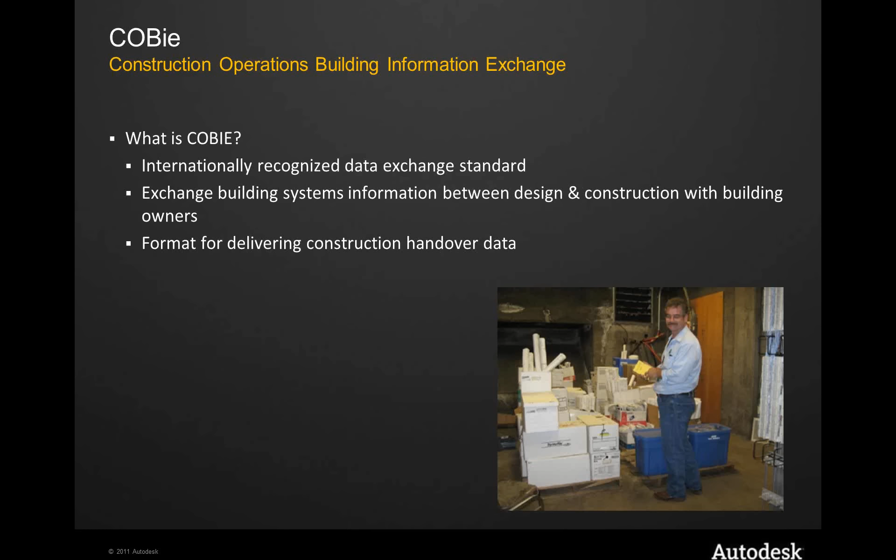It's intended to allow repair, maintenance and renovation task data to be electronically exchanged. It's an internationally recognized standard, and it helps the communication between design and construction teams and the building owners, because it creates a standard that allows for known data fields to be passed throughout the life cycle of a building. So that's the start with COBie.

Next slide. Now, also today we're going to talk about Autodesk's Revit COBie Toolkit. This is a template and some tools that help facilitate collecting the COBie data and passing it downstream. It starts with, within Revit, the facility information and the contact information, which are two pieces of data that COBie asks for.

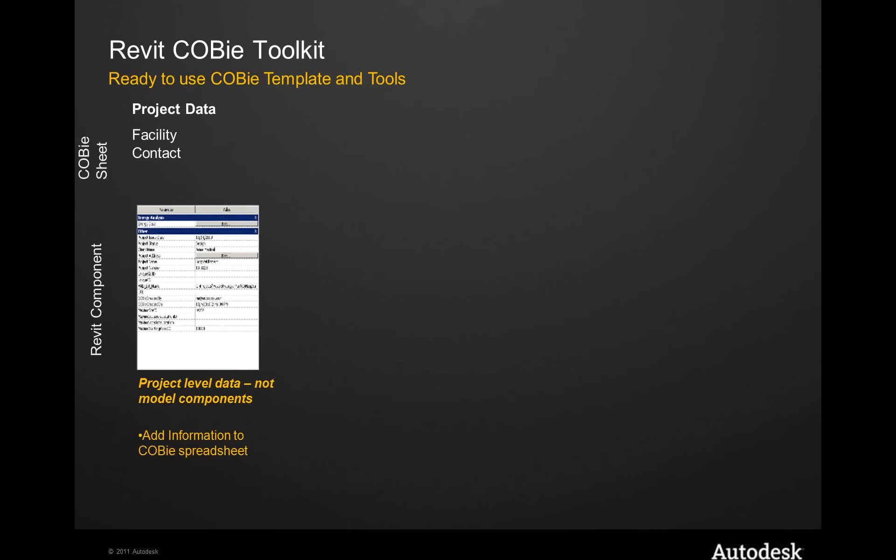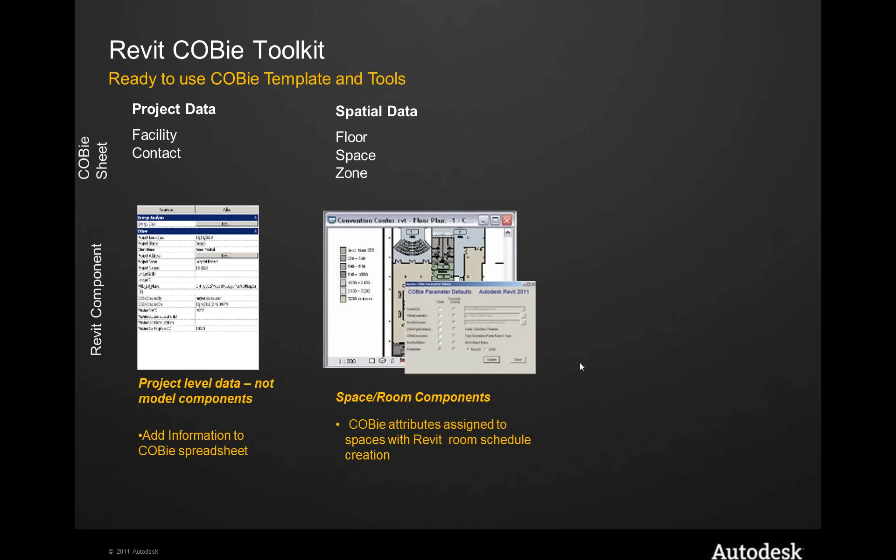If we go to the next. It also includes the spatial information within the BIM model, the floor information, spaces, and zones, which are required COBie data, as well as the building components and MEP equipment. So COBie has many different pieces of data, and we're going to show how the design team can use Revit to populate these sections right now.

And then also to do a little bit more level setting, and this might be redundant for many on the call, but I want to talk about building information modeling as a process, a way to provide coordinated and consistent information. It's a way to simulate or predict the building's behavior. I think a classical application is clash detection, to make sure that all the designed objects are occupying space on their own and not in the way of something else, as one example. But it's an integrated process in order to understand how the building goes together before it's constructed. So that's a quick definition of what building information modeling is.

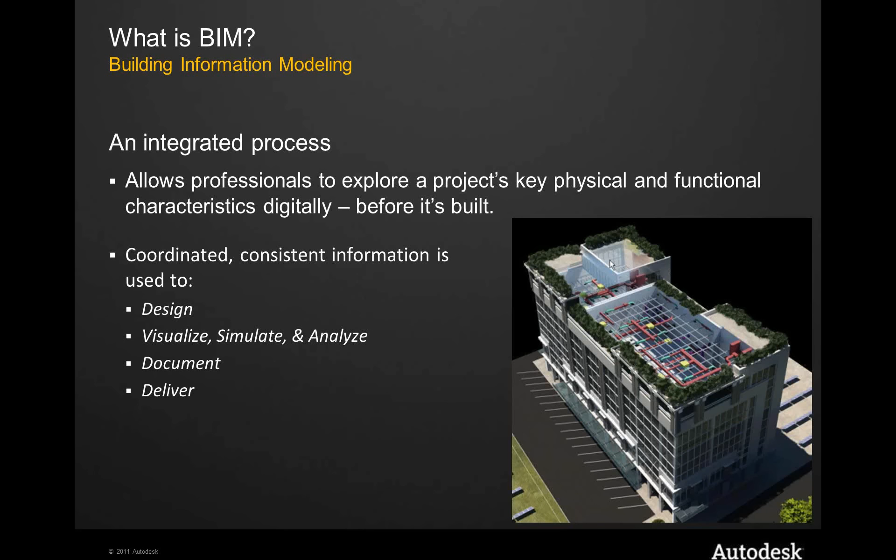And the next slide will slice it from a slightly different angle, which is: what is the building information model? Of course the model participates in the modeling process, but in the model are things we expect: doors, windows, walls, rooms, and equipment—three-dimensional objects that allow us to graphically understand the design, but also have other properties. These other properties are attributes—non-graphic properties, different pieces of data that we can append to the graphical elements just to make them more informative.

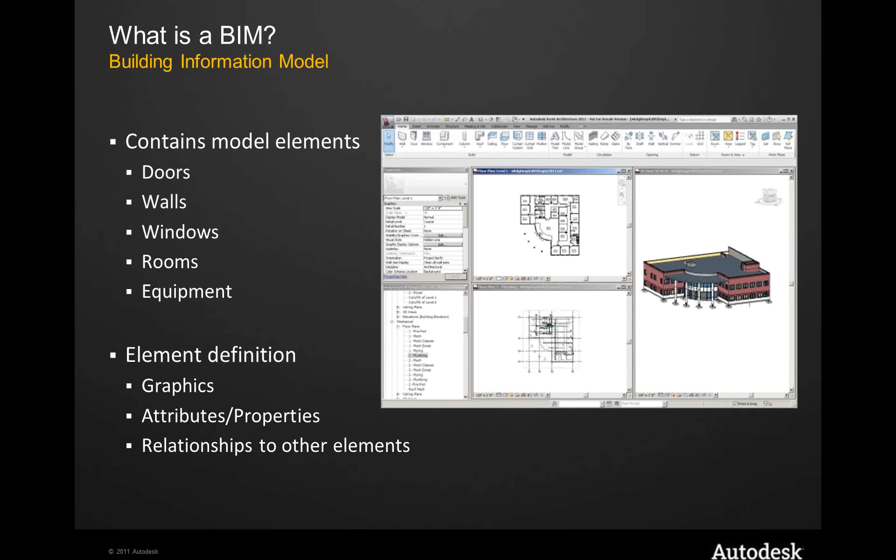And this is where we link in the COBie exchange standard with part of the BIM modeling software, that we've got lists of attributes and properties that are conformant with what COBie is asking for. But the model also has another aspect, which is the relationship to other elements, or the parametrics or behavior of the objects in the BIM model—how the floor relates to the walls, how the doors relate to the walls—and this whole behavior of the model is a building information model. So slicing BIM from two different angles, one as an integrated process and one as a 3D data file, is probably all we need to say about building information modeling, just to get everybody on the same page.

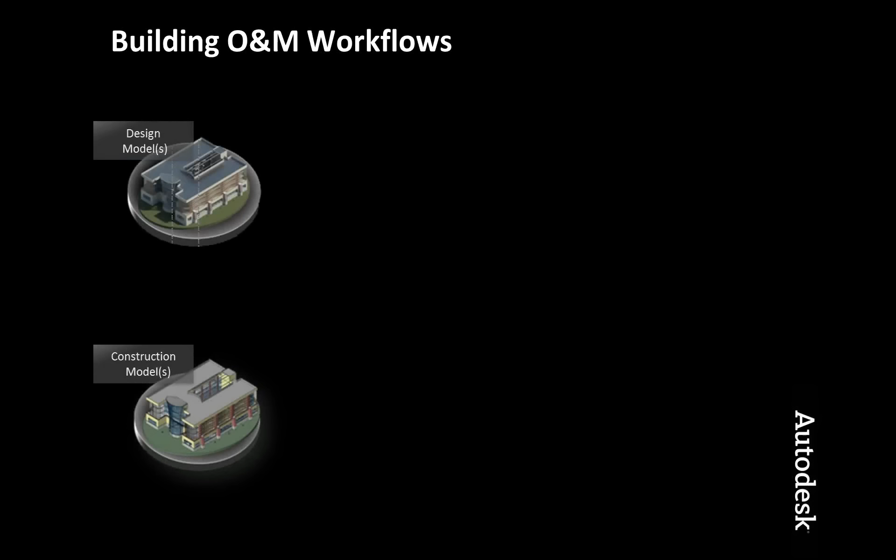So next slide, please. Okay, so then, and this is a schematic, and Rich, if you want, you could roll this out for the most part, but this is sort of a schematic of conceptual workflows, and there's definitely variation probably on every single project—a bid build project or design build—and sometimes if the teams are well coordinated and integrated, the design model will pass fairly smoothly to the construction model, but often not.

But if we start on the left, we've got the design BIM models and the construction BIM models. These are going to meet at this schematic conceptual point of an owner's model view. This owner's model will have information—if we're doing things the way that we want them to work—it's going to have the COBie information from the design team, and it's going to have the COBie information from the construction team. Rich will show how this happens in particular, but they sort of meet at this owner's model.

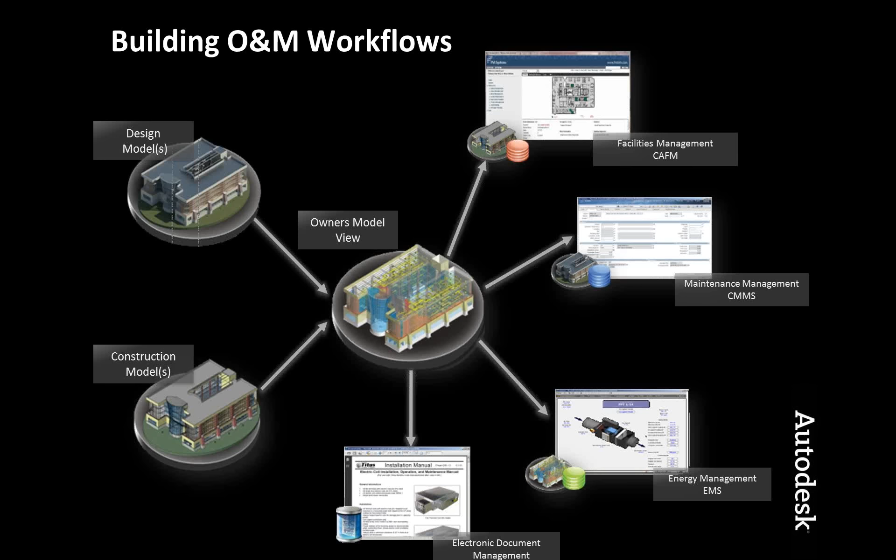So we have the graphics, we have the attribute information, we have COBie information, and then we have it in a way that's usable, that's searchable, and able to participate in other types of systems, such as a facilities management system, or maintenance management, or energy management, or document management. So this whole idea of COBie is that we want the data to be transportable to the place that it is most useful, and to be able to do this in an easy, effective and efficient kind of way. Okay, next slide.

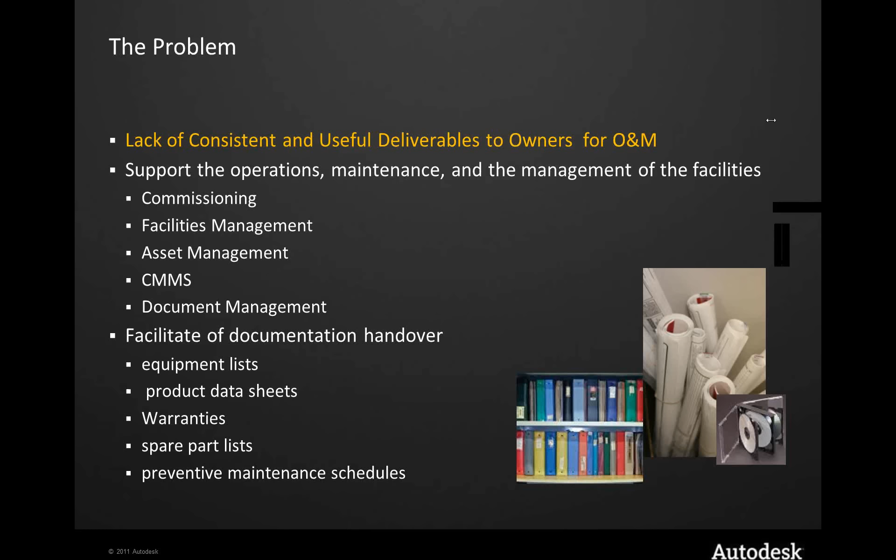One of the things we're trying to avoid is data that isn't really useful. A good example would be handover information that comes over as hard copy, which is useful to a certain extent, but COBie is a much more portable and effective way of doing that. Even electronic handover may come as a series of PDFs which aren't quite as useful. We've seen one project where all the hard copy documentation was scanned into one gigantic PDF, and it met the requirements of electronic transmittal but was fairly problematic to use. This lack of consistent and useful deliverables for owners and operation maintenance is a real issue, and it's one that COBie is well framed to address, helping with that part of the design-construction handover process.

So next slide, Rich. I think that's about all for me. Do I have another slide, Rich? Yeah John, you've got the slide regarding graphic and attribute data collection, creation and editing. Oh, that's right, okay.

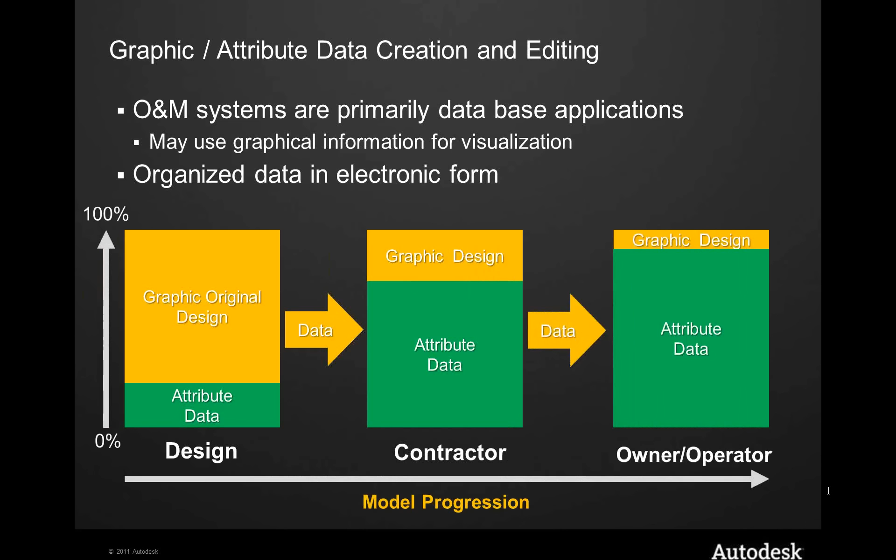One of the challenges of working through this workflow is that early in the design stage, the information is, for the most part, graphically oriented. Understanding the design is a very spatial kind of process, and the attributes on that information, while there might be some specifications or specific information about those objects, aren't known yet. They've been designed conceptually, but they haven't been installed, so some of this information isn't really known.

But as we move to the contractor, that mix changes. We see attribute information during construction playing a more predominant role, and then on to the owner and operator, the graphical information becomes much less significant. If a tenant is changing a space, or someone is moving in and out of a room, it may be an easily described database attribute change with no real graphical implications. So one of the challenges of working in this life cycle is that the mix of graphic to attribute information is sort of in flux.

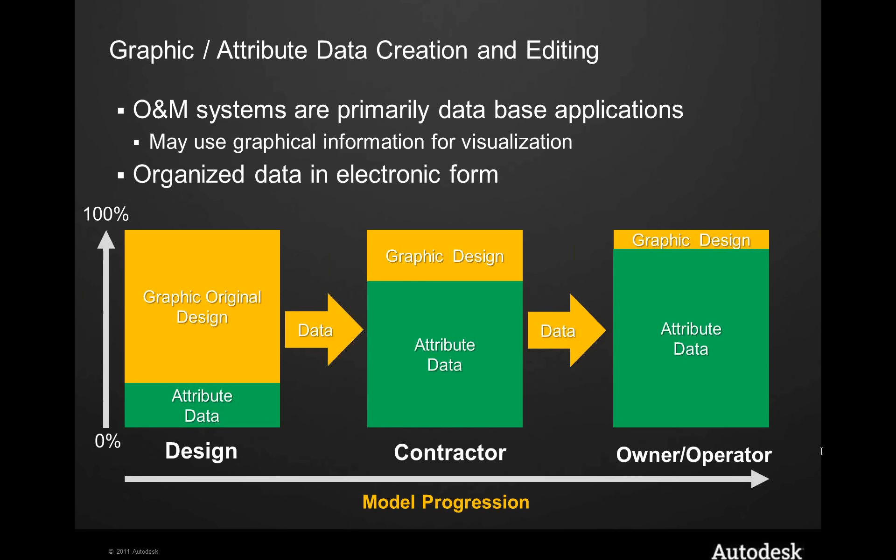COBie helps harness this because it participates in all the stages. It captures as much information as possible in the design phase, passing it to the contractor, and then ultimately to the owner-operator as a series of attribute information. So this is a challenge, but it's one that COBie helps with quite a lot.

Okay, next slide Rich, and hopefully I get this one right. The last slide I have is that the BIM can be used to populate COBie information, but it doesn't have to be. The COBie deliverable essentially is a spreadsheet, so information can be typed directly into it, but we really feel strongly that using building information modeling with COBie is the better approach.

Using BIM with COBie, one, allows the process to be built in rather than added on. Two, it helps with quality because of that orientation - throughout the process you're adding information. And three, it helps apply quality assurance standards because you're funneling it through the design process rather than just typing it into a spreadsheet. So it can be done manually, but using a Revit utility with COBie greatly facilitates the process. And I think that's it for me.

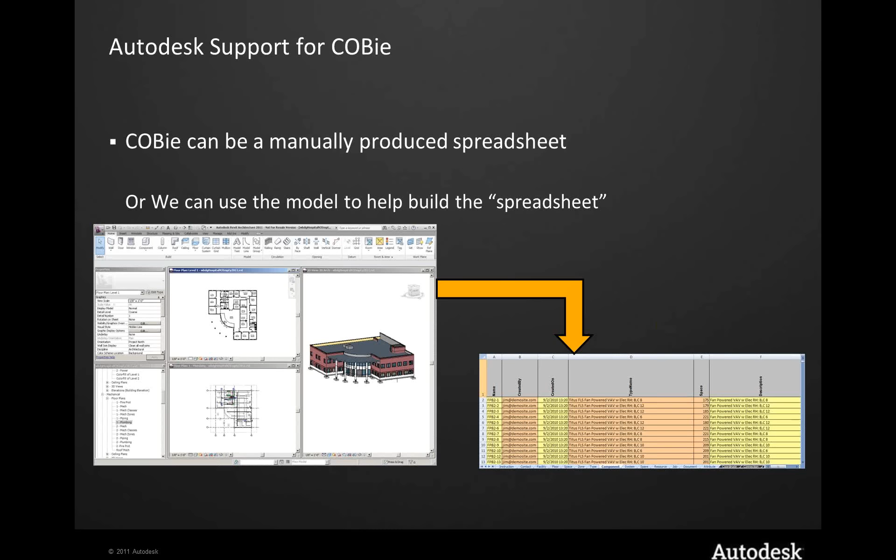Rich, turn it over to you to give us a more detailed explanation of COBie and show us how it works.

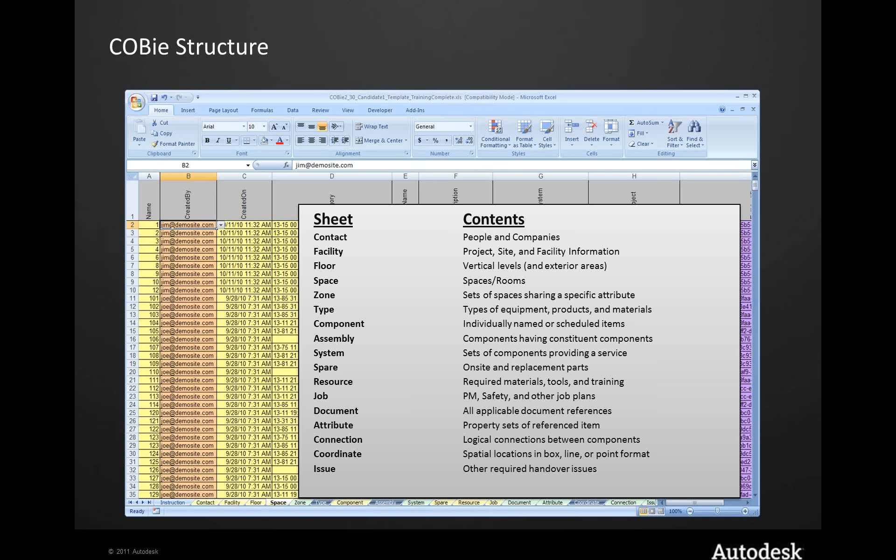So as we go through COBie, what I'd like to do is help you understand the structure of the spread. I'm going to do it in the context of the spreadsheet, but understand that COBie is really structured as a series of worksheets in a workbook, spreadsheets within a larger spreadsheet. You could look at it as tables within a database. It's really about understanding the hierarchy and the context of the information in the way the data is structured.

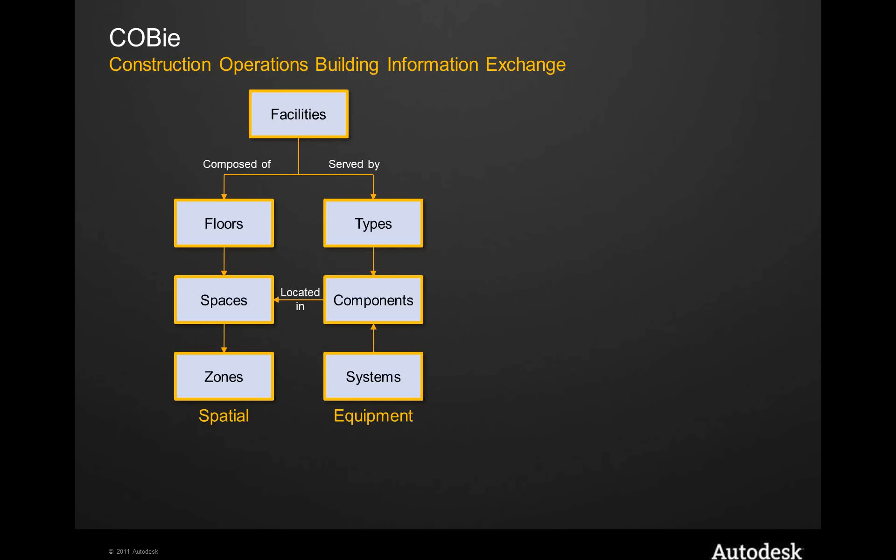So what I'd like to do is use a graphical view to help understand the hierarchy of the information we're going to be working with. If you look at a COBie spreadsheet, one of the first tabs you will see is the Facilities tab. To understand the flow of the data, we can look at facilities being composed of a series of floors or stories, which contain spaces, which can then be grouped into what we refer to as zones, or groupings of the space itself. In addition, those facilities are served by a series of equipment types and then actual instances of that equipment, and that equipment can be grouped into logical systems. So that's the basic spatial and equipment hierarchy of the model itself.

In addition to that, there's some information also added to the COBie spreadsheet which defines job sequences and job steps by describing the steps in a particular job, the resources required to do a particular task or job, and what spare parts or equipment might be required as part of that job sequence.

In addition, we'll find a number of what I'll refer to as common tabs, which refer to things like who the contacts are—analogous to a contact list in Outlook. Other tabs specify the documents that are attached, any issues that have come up, simple coordinate geometry, additional attributes, connections, and various other information about any one of these levels of information.

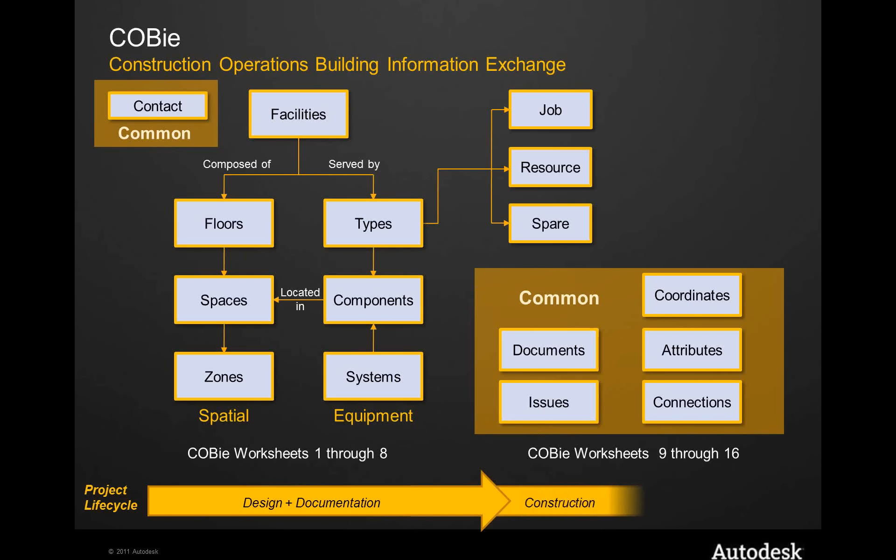So if we look at this structure, moving from left to right, we're moving from COBie sheets 1 through 8, and then 9 through 16, which is the supplemental information. Typically that information is built out in this process of left to right. Data is going to be added through various aspects of the project itself, but in terms of understanding where some of this might be created, it generally flows from left to right.

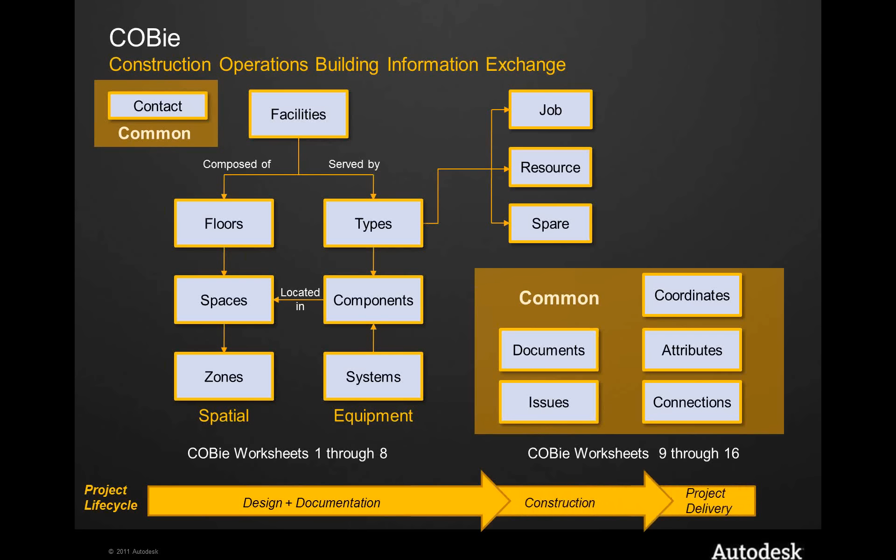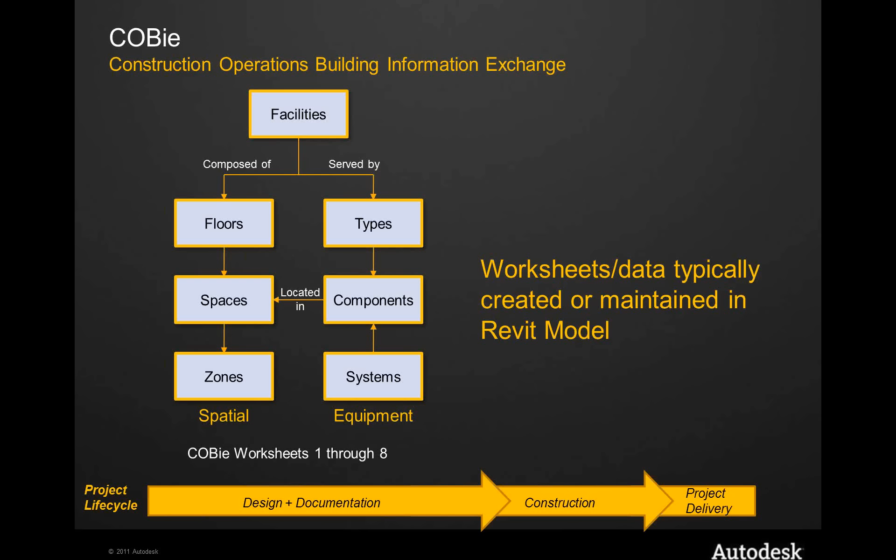The next part we really want to talk about, the area we're going to focus on, are the 7 sheets we see here, which are typically the ones created and maintained in the Revit model, or in the building information model. Again, this is not meant to be all-encompassing about COBie, but really about understanding how the COBie data model fits and applies to the Revit model.

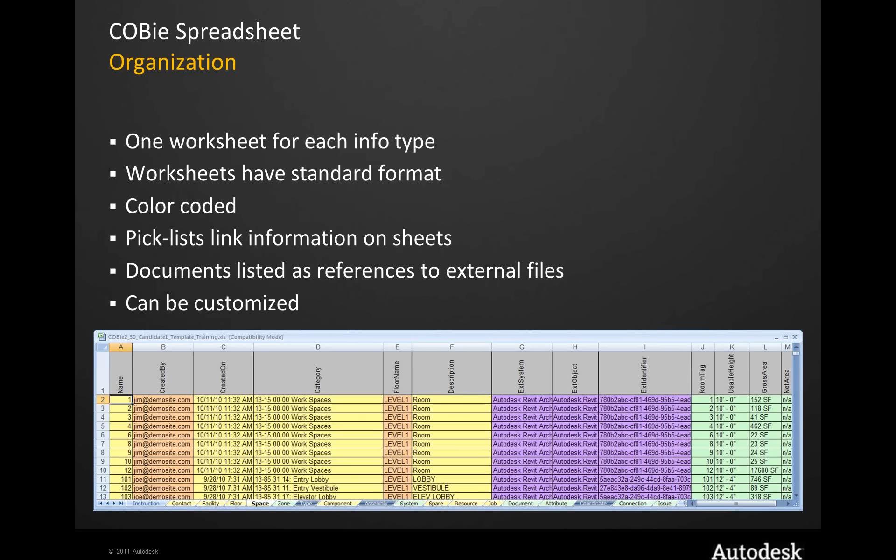Before we move on, I want to go over a few things about the COBie spreadsheet so everyone understands what the colors mean and what's going on when they're looking at this. Typically, you're going to have one worksheet for every information type, so spaces are on their own sheet, floors or stories are on their own, equipment types will be on a separate sheet. They're color-coded, and where possible there are a number of pick lists provided to facilitate data entry. We can add documents to any of this as a reference to external files, and there's a level of customization we can also apply to the COBie spreadsheet.

So if you look at a standard COBie spreadsheet, the first thing you'll see is that there are typically 1 of 5 colors for the columns. Anything in yellow is a required field that would typically be entered on that sheet. Anything in orange is a required foreign key, meaning that value would most likely have been defined on a previous sheet.

For example, if we're looking at the space tab in the spreadsheet, you'll see that level 1 is a floor, and it's shown in orange, which means I would have had to define the floor—the story that space is on—before I could create the space. So basically it's just saying that information resides on another tab. Anything in purple is typically populated by the authoring software, describing what application did that—in this case Revit—the type of object it is, and any external IDs.

You'll also see green, which means it's required only if specified by the owner. And on some of the sheets, you'll see gray or white columns, which again are regional or owner specified, so they would only be used if required.

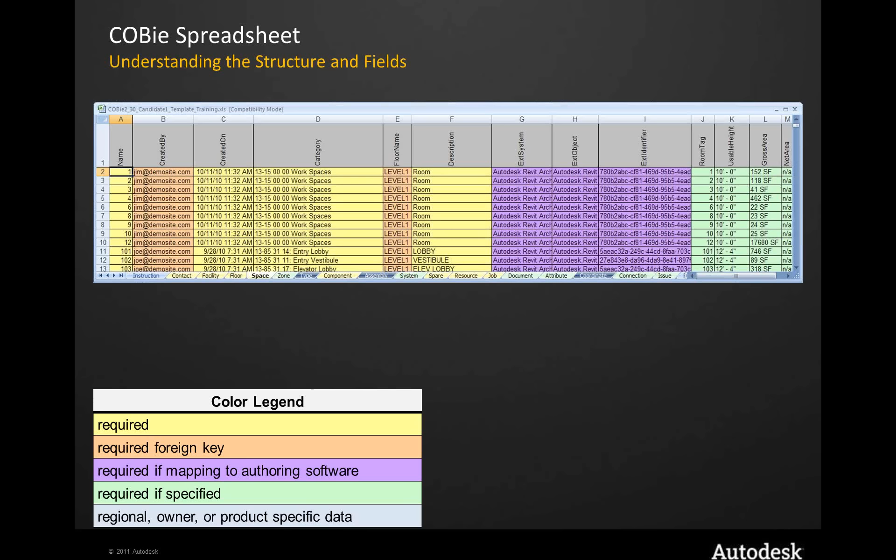The other commonality across all these sheets is that every spreadsheet will have these 5 columns: created by, created on, external, and the system created information. Typically, we're going to help populate that information, so it's not something you'll have to do manually.

Being common to all the sheets, something interesting when you look at the sheet is that if I eliminate those columns from the view, the spreadsheet begins to look more like something we'd be accustomed to. If I remove created on, created by, and external, it's a standard space definition: the name of the space or space number, category, classification, the floor it's on, a description, secondary room tag, usable height, gross area, net area. It's a fairly simple definition that can get overwhelming when you see all the other tabs.

For most of the tabs, you'll notice there are fields that will be managed and typically required by the authoring software. In the case of Revit, for a space, you'll always have a room number, a level it's on, typically enter a description, and the usable height and gross area are calculated fields, so those will be populated for you.

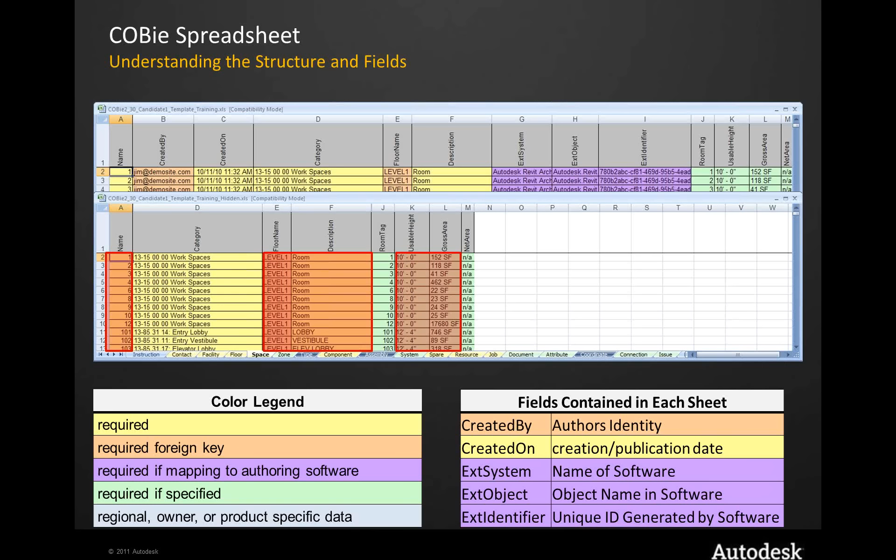Really, the only information in this core portion of the space tab for COBie that we'd need to fill in is the category, the room tag, and the net area if required. So a lot of that information is going to be populated for you.

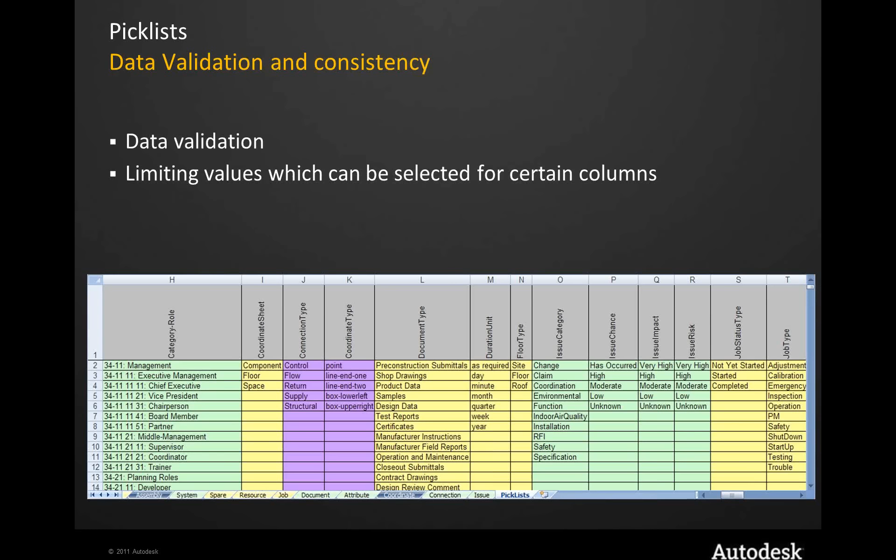There are a number of pick lists. In effect there are 17 tabs, and the last tab shows a series of pick lists. Those pick lists have the values used, for example, in space classification or a document type for documents, and different data such as that.

So how do we get from the Revit model to the COBie output? In this case, we'll be working with the spreadsheet, so let's try to put all this together and map some of this.

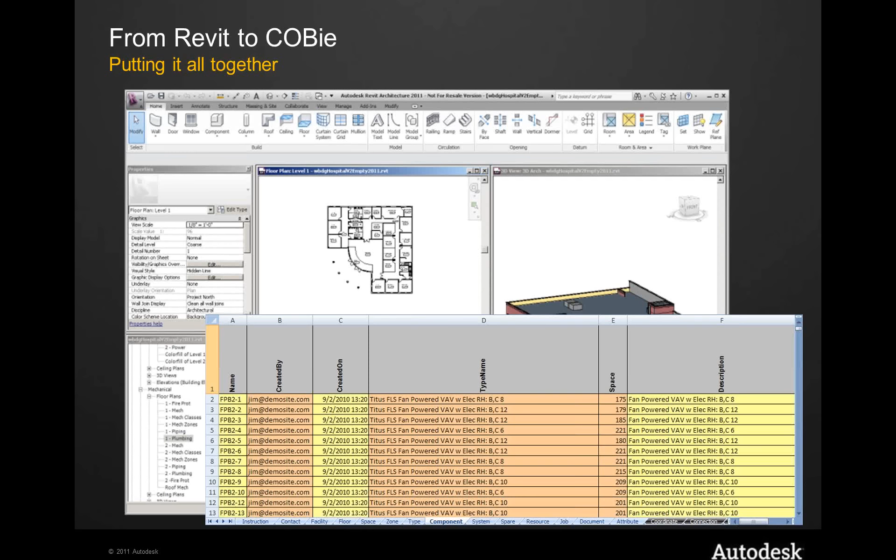I'm going to make an assumption here in this presentation that there's a familiarity with Revit and the building information model. I'll try to deal with it from that perspective, but I think there are analogies to other applications as well.

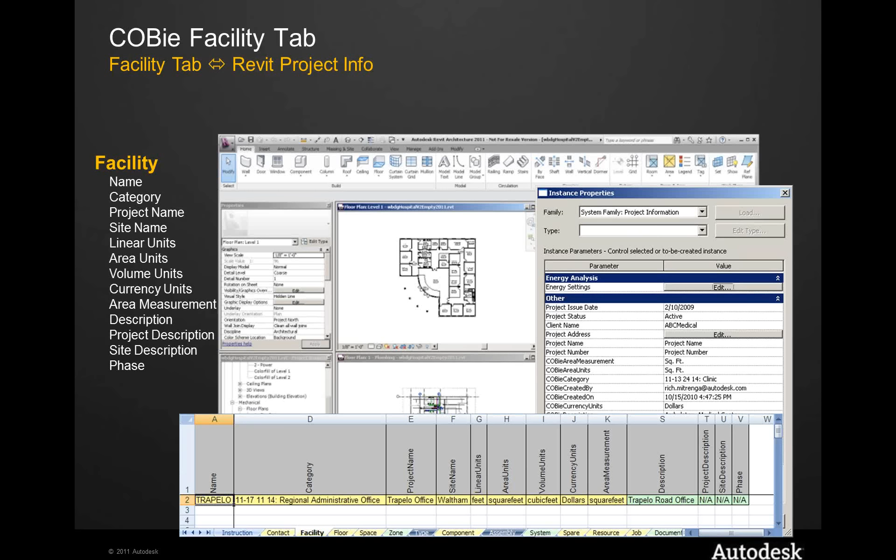The first thing we have when we look at the COBie spreadsheet is the Facility tab, and it's directly related to the Project Information tab. It describes the characteristics of the project, the building, or the model itself — things like the name of the project, the site name, what units we're using, a description, address of the site, those kinds of things. The data you'll typically populate comes directly from that project information parameter, and in the COBie spreadsheet there will typically be only one record on that tab.

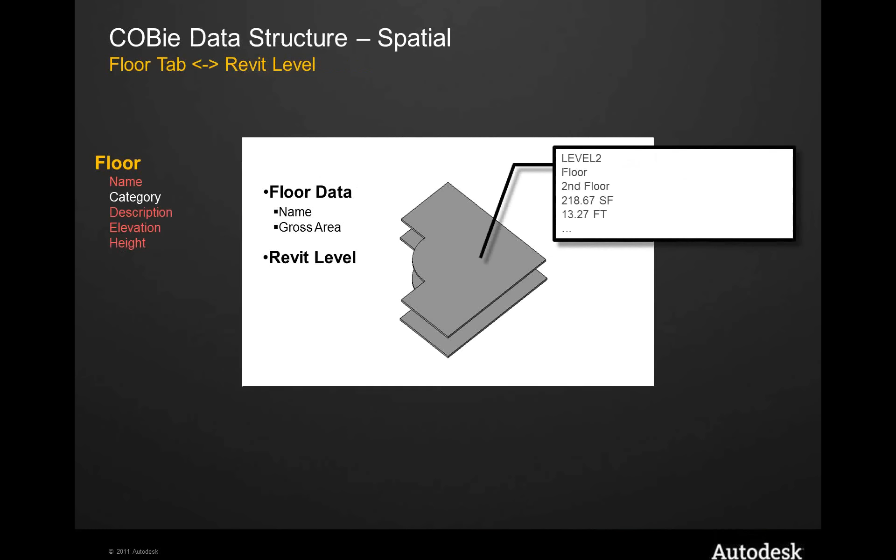The next tab as we move across is the Floor tab, which refers to floors or stories of a building and is typically directly related to the Revit levels. You'll typically have an entry in this sheet for each level in the model, and that level is analogous to the story or floor that a particular object or space is on. It's described simply by the name, the category or type of level or floor it is, the description, elevation, and height.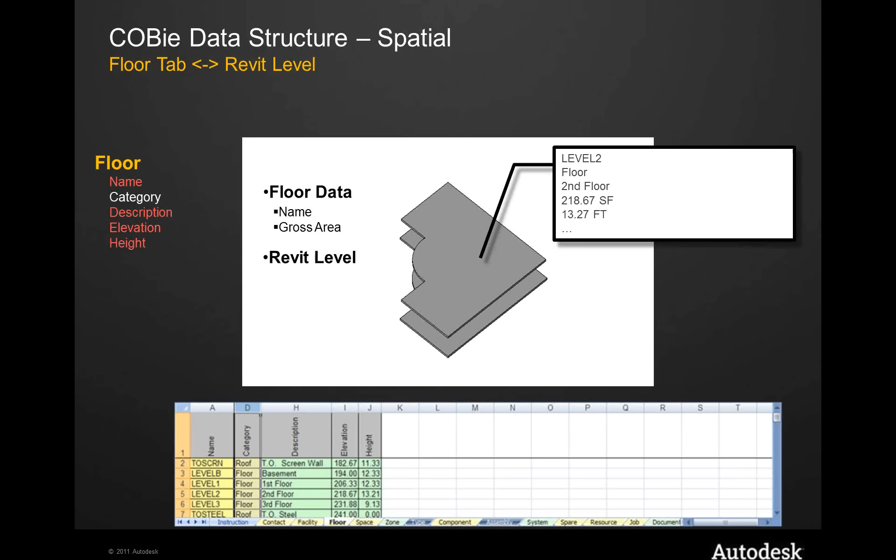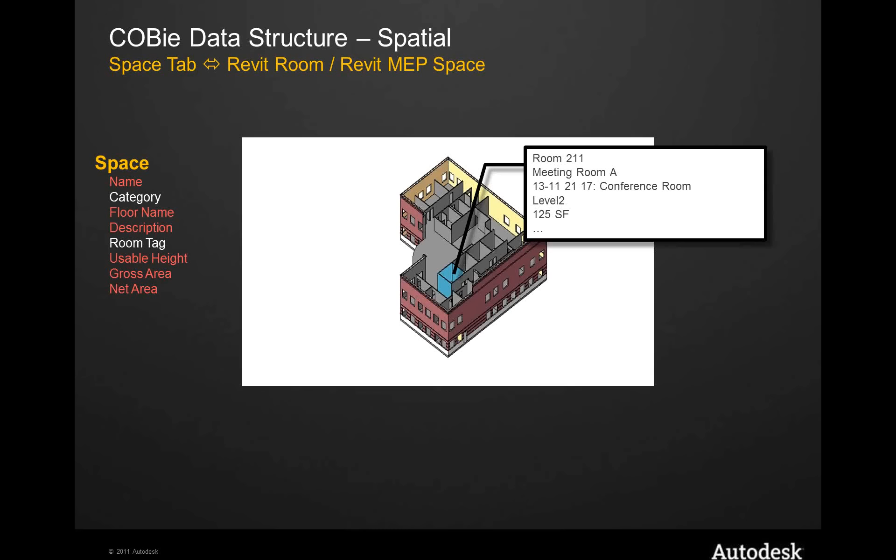And again, a lot of that information is going to come directly from the Revit model. As we continue moving to the right, the next spatial component is the Space tab, which is directly related to a Revit room or a Revit MEP space, depending on how you're doing that. There will typically be a series of spaces on each of the floors that we define.

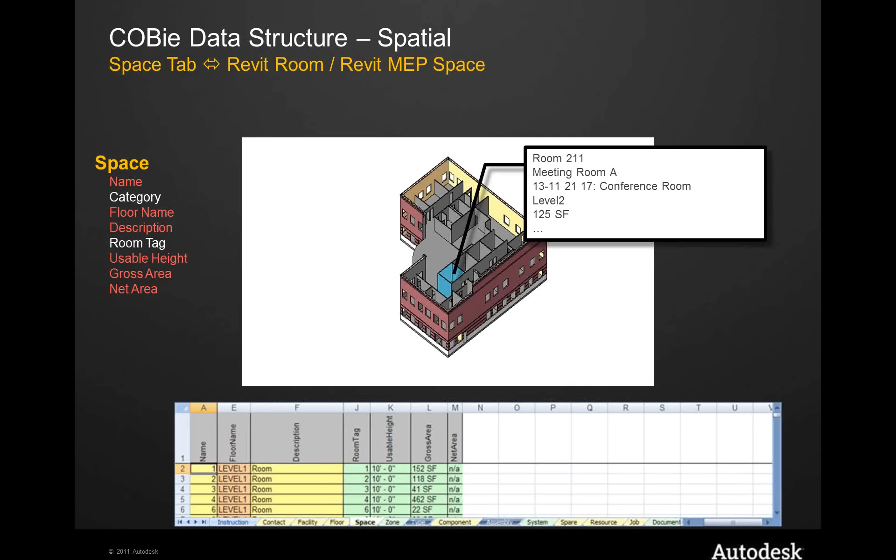So as we look at this, we have a facility. Within that facility, we have a series of floors, and on each of those floors, we will have a number of spaces. So now we're into the process of classifying those spaces. We have name, category, simple information that is required for the COBie spreadsheet.

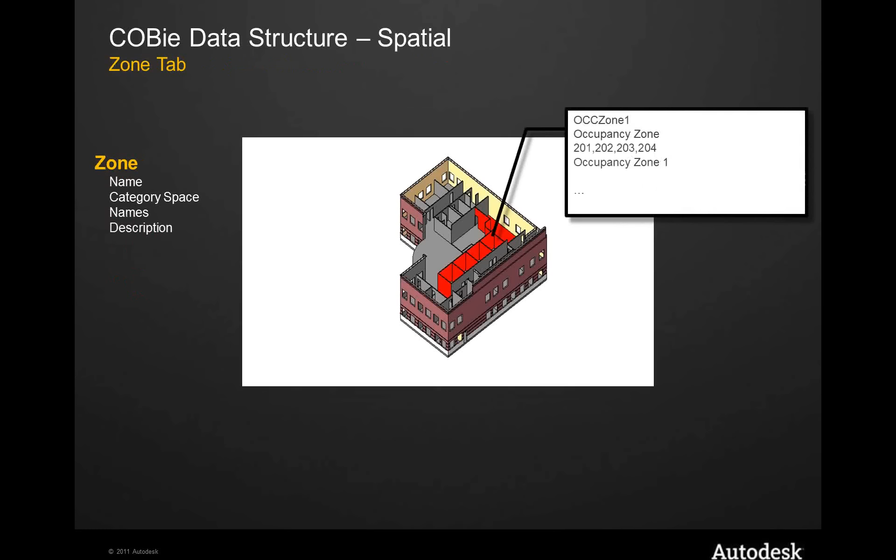Now, the last tab in that spatial structure is a zone, and what a zone is, is a way of logically grouping a series of these spaces. So in this case, I have an occupancy zone by defining 4 or 5 spaces in either a comma delimited or a list within that spreadsheet to provide a definition of how I might group some spaces. So I may have something like this occupancy zone, or it could be an evacuation zone.

Maybe in the facilities management world, you might think about it as a department. So these 5 spaces make up the marketing department. So you can use that to logically group a series of spaces to create something that would be a zone instead of creating, say, an area polygon for that.

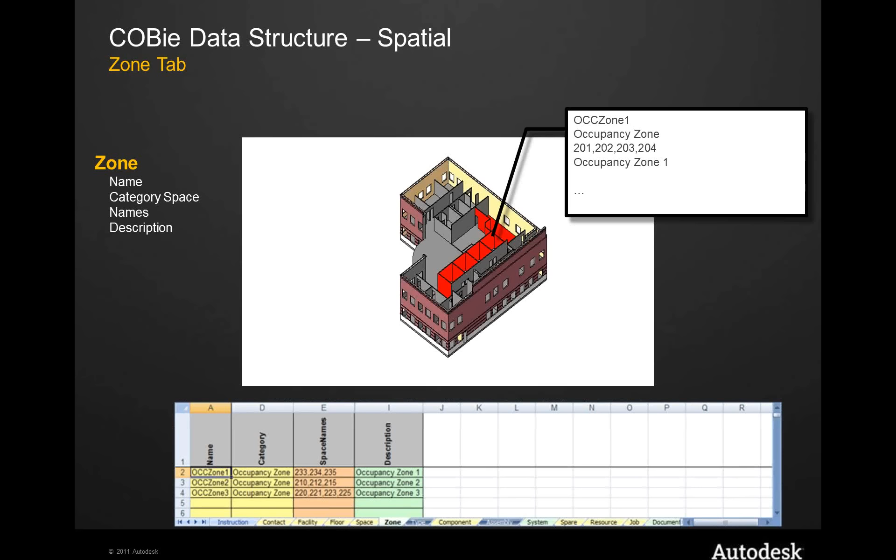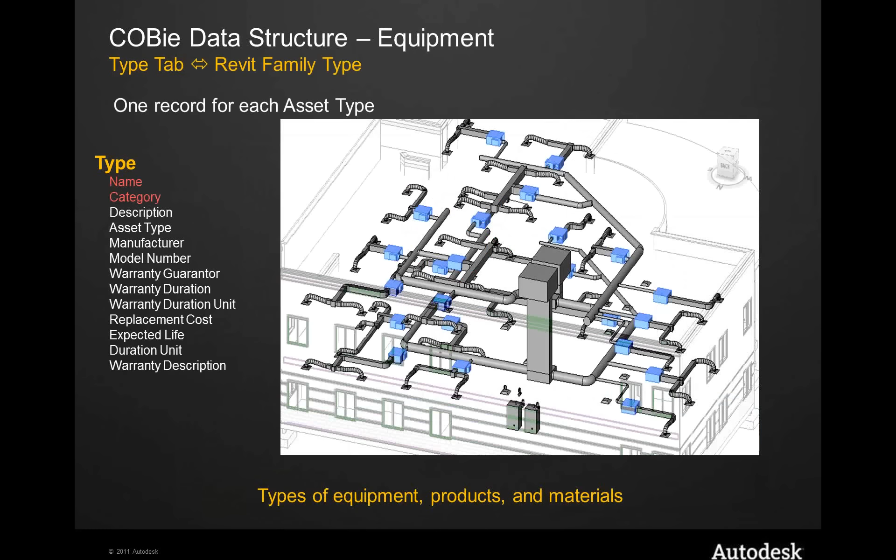Now, the next aspect of this is we're now beginning to move into the equipment. So in this little example here, we have a mechanical system, a series of mechanical equipment. And the first tab that we're going to look at is what we would call the Type tab, which directly relates to a Revit family type.

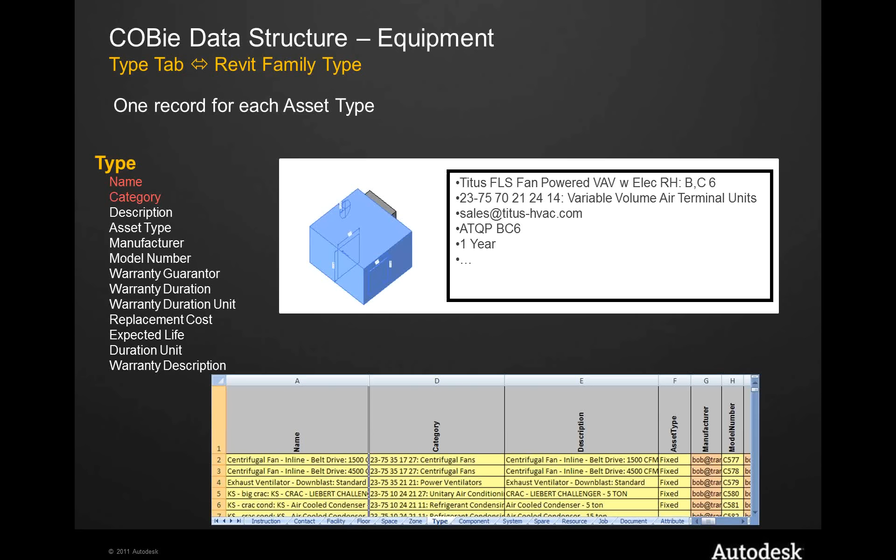So if you think about this, this is the object that you would buy. So it describes the characteristics of all of those instances of the objects themselves, right? So it's something like same manufacturer, model number, warranty duration. They're going to be common across all instances of that.

The next part of this then is to begin to look at the COBie structure around the components. So the next tab is the Component tab, which now describes the physical instances or placement of each of those devices and or pieces of equipment. And what that's going to describe is the information that is going to be unique to any given instance.

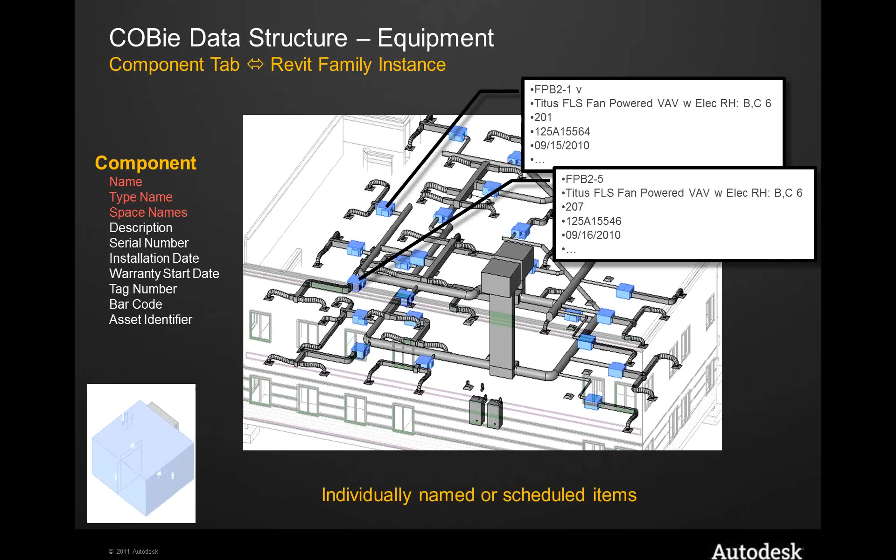So another way of thinking about types versus components is, if you think about this in the world of AutoCAD, think about it as a block being the type and the instance of that block being the component. In Revit, it's the family type versus the instance. So typically you're going to have a number of component records for each equipment type. That's basically what that's describing.

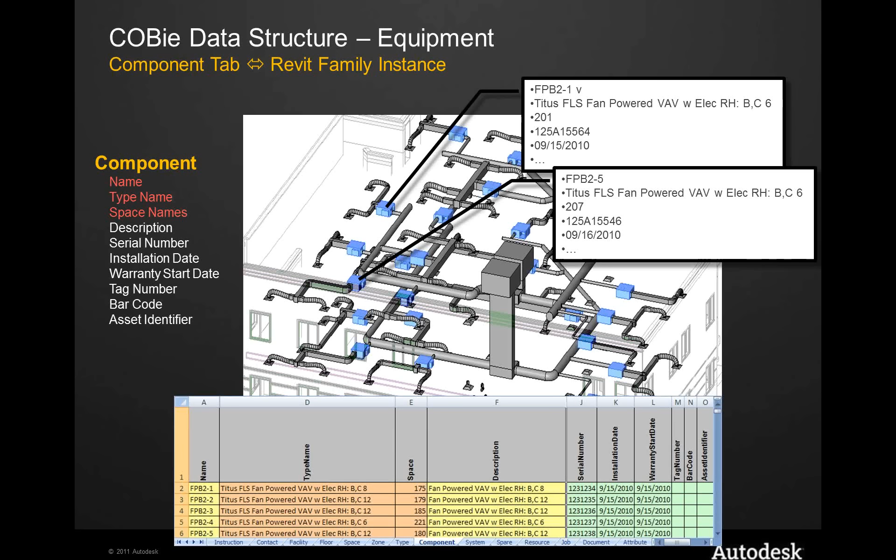And in the same way that we're able to group a series of spaces into logical zones, we can also do the same with equipment to create these systems. And again, this can be a physical connection of sorts. It can also apply to the idea that I might have a number of components that I may maintain at the same time. So a series of doors could be put into a system.

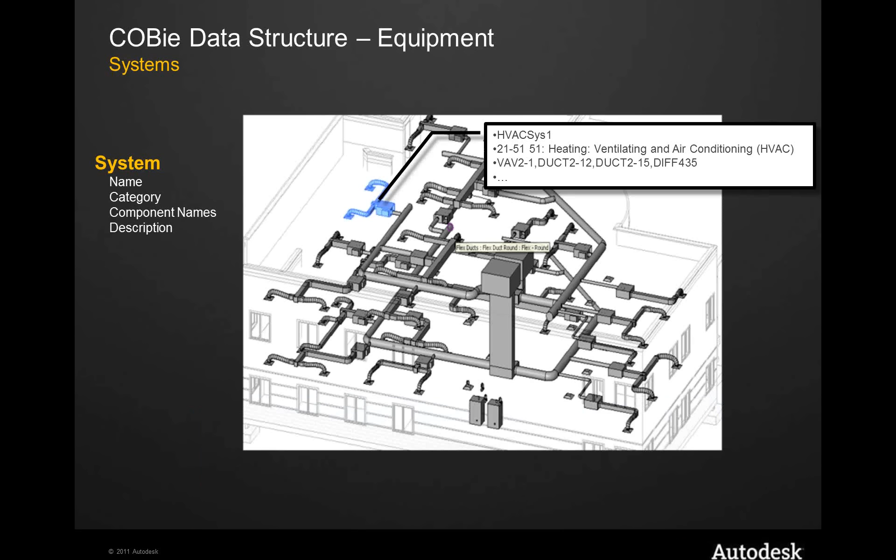So it's not necessarily limited to the traditional, if we think about it from the Revit perspective, mechanical or electrical systems. We can have systems that comprise any grouping of the components that are on the previous tab. So in that case, that sort of begins to build out the structure and the parts that are directly related to Revit.

Again, I mentioned that there's some customization. These are basically the rules around the customization themselves, and they're described in a lot of the COBie documentation, basically saying things like headings may not be changed, green pick lists may be updated based on local language requirements, classification schemes may be substituted for pick lists. For example, in the U.S., we tend to use OmniClass. In Europe, they haven't fully adopted that, so they have their own standards that they're going to choose to use.

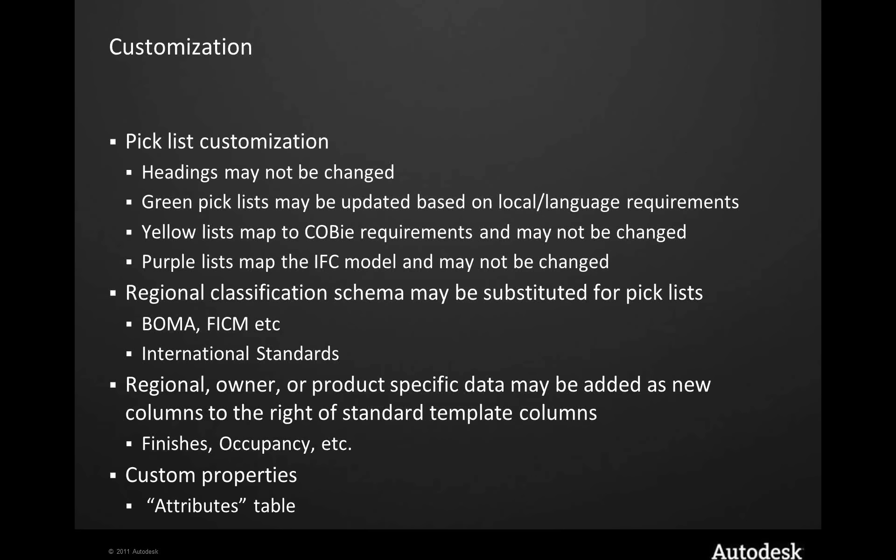You may add columns, say, to the space table. An owner may choose to add things like finishes, occupancy, and we can also add custom attributes that can be applied into the attributes table as well. The thing is, as John mentioned, to understand is COBie describes in the core structure of the spreadsheet a series of attributes that will typically be common to all instances or all versions of any given object or space.

So, for example, everything you're going to track will typically have a model number, a manufacturer, a serial number, maybe a barcode number. But a door may have fire rating, or you may want horsepower on a motor, or body material for a valve, or information about an air handler, so you might be looking at the air filter type.

These attributes are not necessarily specified in the COBie spreadsheet itself, but something that in working with the owner and the folks asking for this information, has to be decided up front. You can't assume we know what is or isn't expected beyond those core fields. It really requires an intentional conversation with all parties involved so that everyone understands what is being asked for when someone requests the COBie file.

I've worked with some customers and companies that have said in their specifications nothing much more detailed than, I would like a COBie file that I can use to populate my O&M system. And that has two different meanings.

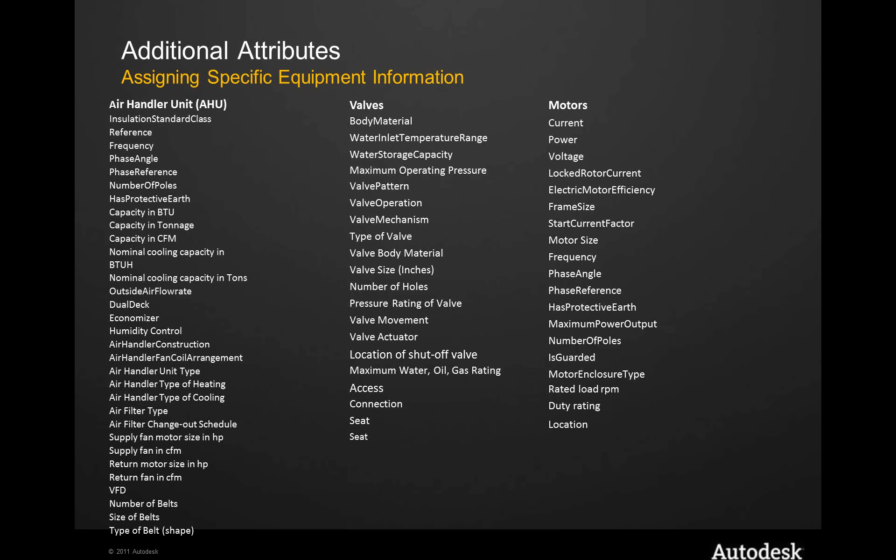For the person collecting the information, they're looking at the spreadsheet, at the column, saying this is the information I'm expecting. The owner now is expecting the information you might be seeing on the screen here. So again, you need to make sure everyone is on the same page in terms of what information you want.

Now, in the context of this presentation and in the interest of time, there's another series of tabs in that spreadsheet that I really won't get into much detail on. They don't, with the exception of the attribute table, necessarily originate or get stored in the building information model per se.

And those are the additional sheets. So I could just quickly describe those as assembly, spare parts, the job sequencing, the resources required, documents that might be there, connections, coordinates, and any safety issues that might come along. So there again are sheets to describe those in a series of fields.

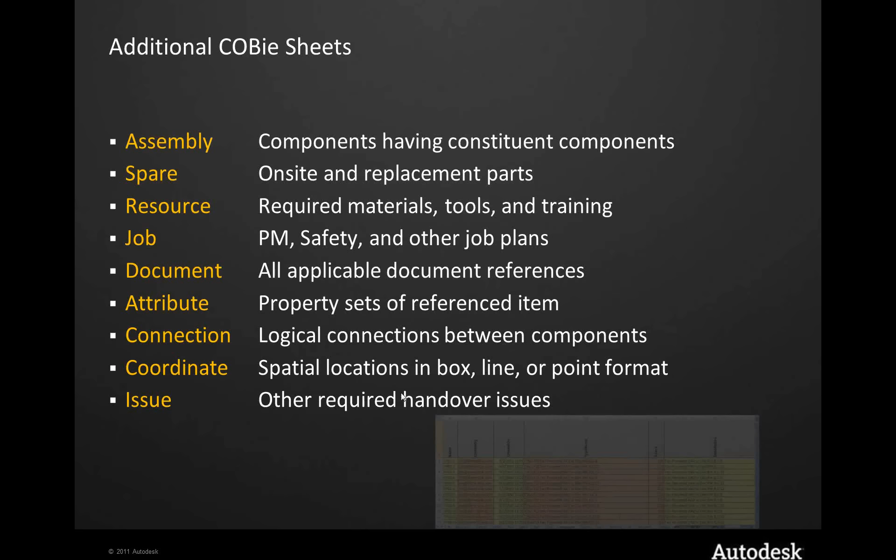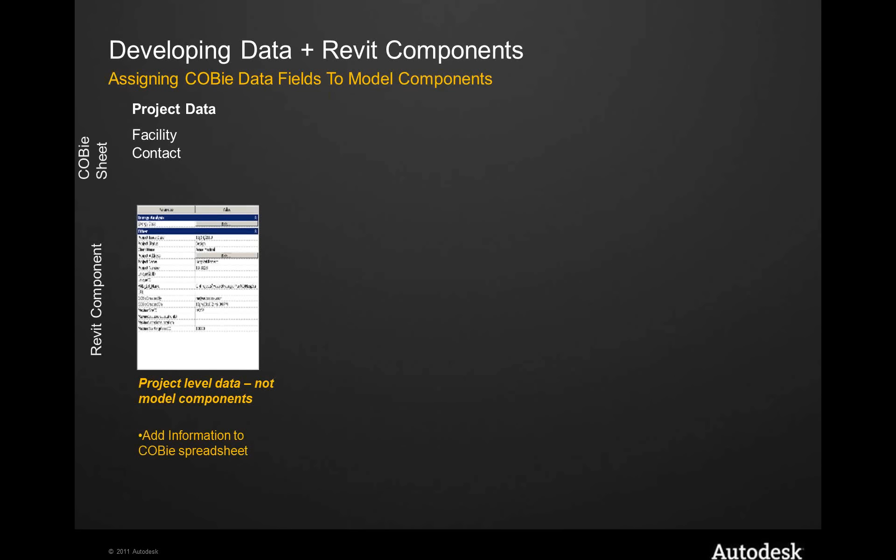So what I'd like to do now is briefly go over, for those using Revit, the Revit COBie Toolkit, to describe what's there, and then I'll quickly demonstrate how that toolkit works that we're providing. As John mentioned, there's a series of utilities and tools that we provide in order to help you populate and create the data required for COBie.

So if we look at the general structure here, we have the project data, the spatial data, and the building component information. We're able to store and document the project information, the facility information in the project parameter. We can also add a contact record there if need be - it could be the person who's responsible for that model.

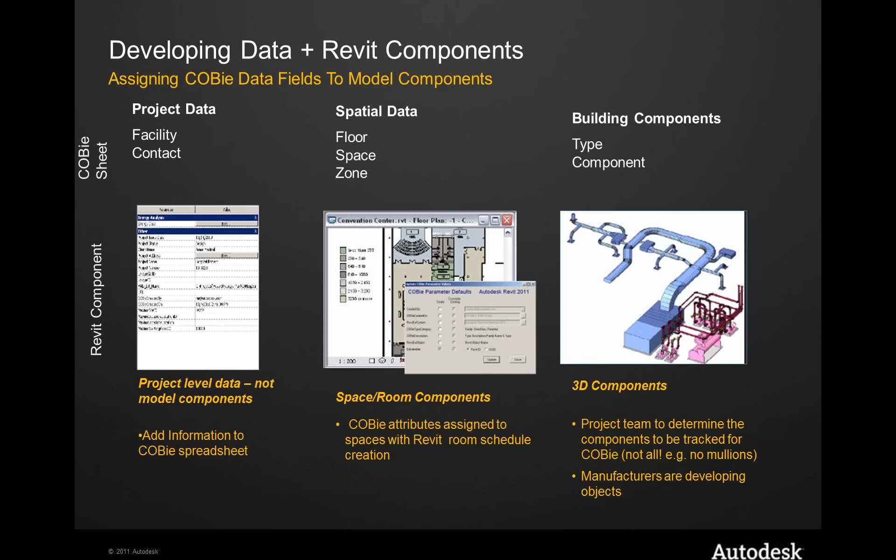We also have the utilities to store and collect the floor information or story information or levels, the spaces or rooms, create the zones, as well as managing the types and the components - I realize system is missing off that list. So again, being able to relate that and begin to gather and collect some of that information.

So when you download the toolkit, and I'll put the address up here at the end of the presentation, there are a series of six components within that toolkit.

And the first is a Revit template, which provides the COBie formatted schedules, schedule keys, library files already populated that come with the model, as well as a means to be able to export that information.

You also get a blank project, which is essentially the same as a template, except rather than being stored as a Revit template, it's stored as a project file. This is a little more useful in being able to populate an existing Revit project that you may have started prior to implementing the COBie toolkit, and basically allows us a means to transfer schedules and other information.

We have a couple of families to support the zones and systems which are typically not associated with Revit model objects. Now, in Revit we do have mechanical systems, electrical systems, and we could support those, but things like occupancy zones and the simple definition of a system of doors, Revit really doesn't have a way to create that, at least not currently. So what we're doing is providing a series of families that can be placed at the site level to support the definition of that information.

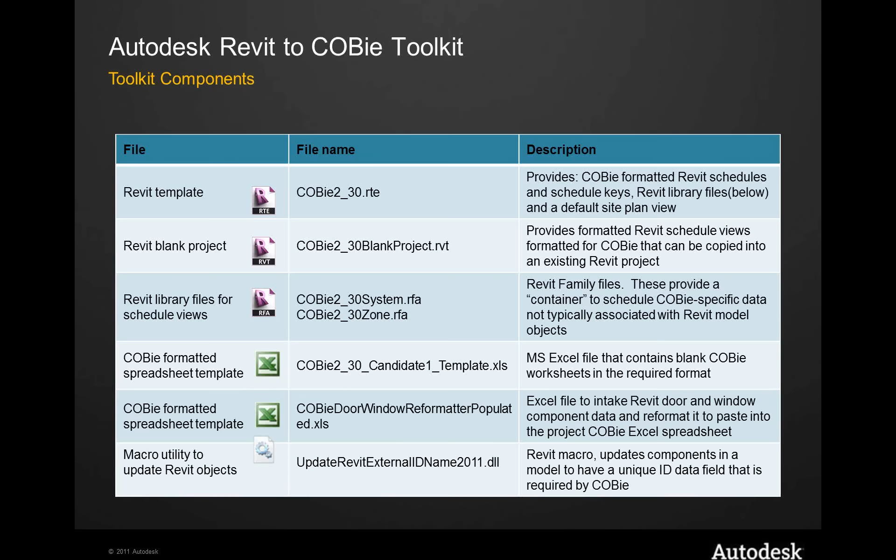So if we look again at what the COBie enabled project is, if I create a project with the template, you'll find we have a series of schedules that will fill in, that will come into the model, as well as a schedule key which has all the room and space categories that can also be used to apply to the spaces.

The reason we're providing only the space classification is that Revit supports OmniClass on all the family objects, the family types, and the components. So it's very easy to create those in the context of a family object.

You'll also see at the bottom on the properties panel, we have the various COBie parameters that are required for the model, which are not by default part of a Revit model. So again, just information that we can add into places where we can put data required for the model.

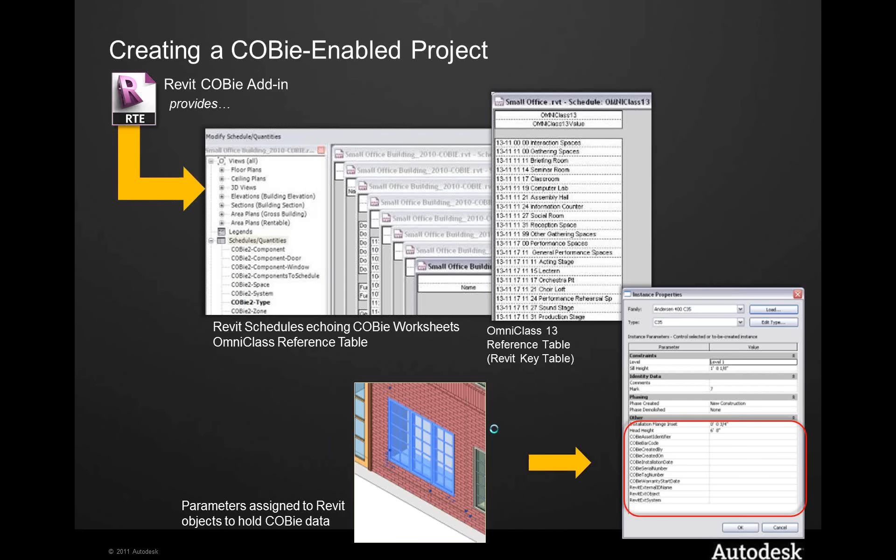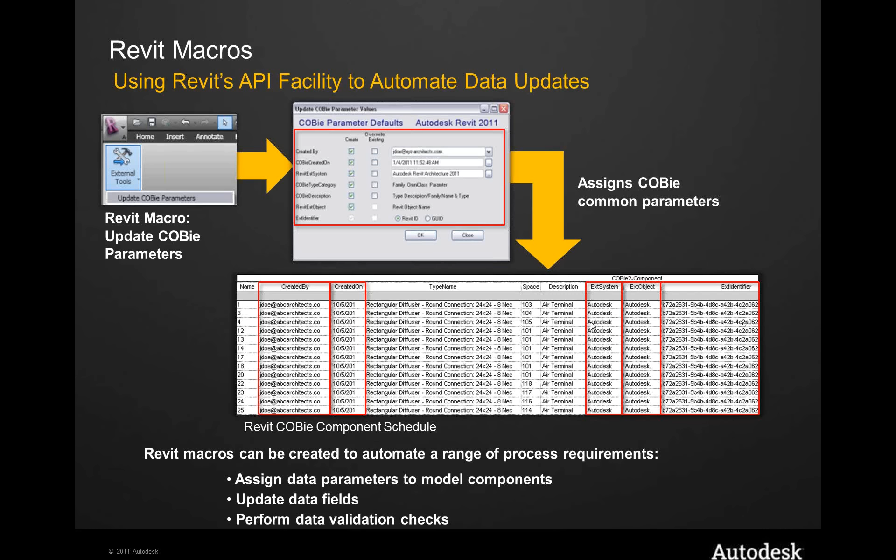I mentioned the add-in for updating the parameters, things like created by, created on, if you have a specific value you want to put into that external system, or we can use the defaults. A lot of this is populated with defaults, but other information, like how you want to describe the external ID or the key from Revit, whether it's a Revit ID or a GUID, you have that option when you're populating it. You see it begins to populate out the information, and those 5 fields I showed earlier are populated directly by that utility.

Once that's all done, we can very simply open up those schedules that we created, and you'll see they're populated with the information. We can export those schedules to a comma delimited file and paste them right into the COBie formatted spreadsheet. The reason we're doing it in that form is that we really want to be very intentional about how that data is placed into the COBie spreadsheet, because although the first time you do the export, it certainly could go right into the spreadsheet.

As John mentioned, it's perfectly legitimate and part of the workflow to add or potentially update information in the spreadsheet while data may be updated within the model itself. Some of that data may not necessarily move back up into the model, so we want to be very careful that we're not overwriting data that someone may have managed or dealt with inside that spreadsheet.

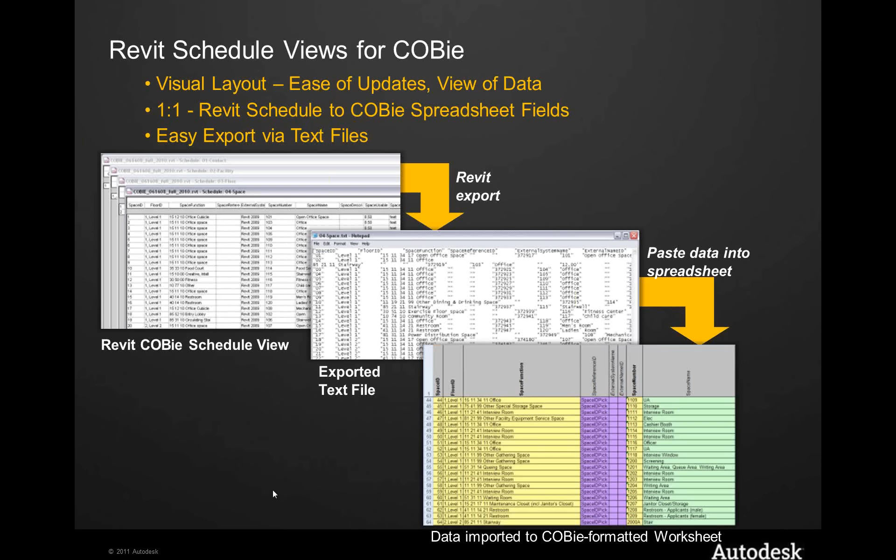At this point, what I'd like to do is go over what the support is. It's out of the box. We create a new model using the template. When I say out of the box, there's nothing we have to do other than open that template and install the add-in to be able to do the work. We can add the COBie framework to an existing model, or start a new model. There's automated generation of a lot of the data required for COBie.

So there's a lot of information, and for anyone interested in working with the toolkit who may not have downloaded it, go to www.autodesk.com/buildingowner. You'll see a link to the COBie toolkit toward the bottom of the page. Simply click the Download Now button, and that will download the toolkit. There's an instruction manual there that will walk you through the rest of the process.

What I'd like to do right now is go through a quick demonstration of how that works. Let me switch a couple of things, and we'll jump into Revit. I'm going to very simply show you how we start a brand new project with the COBie template and what comes in.

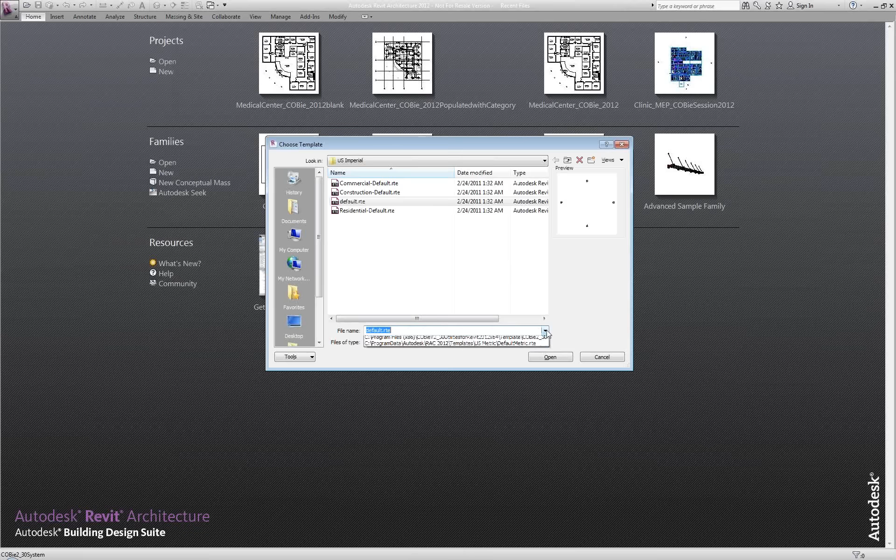The first thing I'm going to do is specify that I want to start a new project. We'll browse to our COBie template—I have that placed right here. Some folks will put it right into their template library; I've chosen to put it in another library. We'll go ahead and open that and create that project.

The first thing you're going to see when this project opens is, on the left side of the screen under Schedules, we now have a series of COBie schedules. If I click the Space tab, you'll see the Space schedule. What you're going to see here is that the columns are identical to what you saw in the COBie spreadsheet.

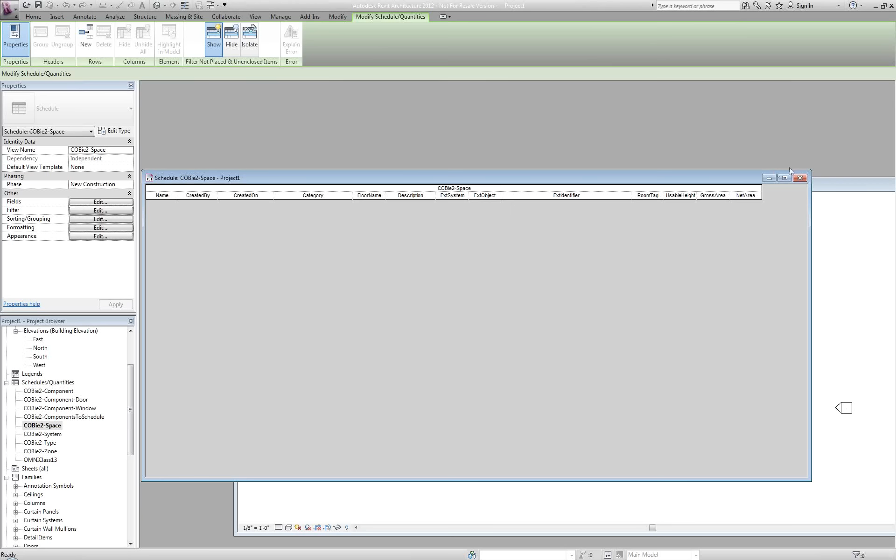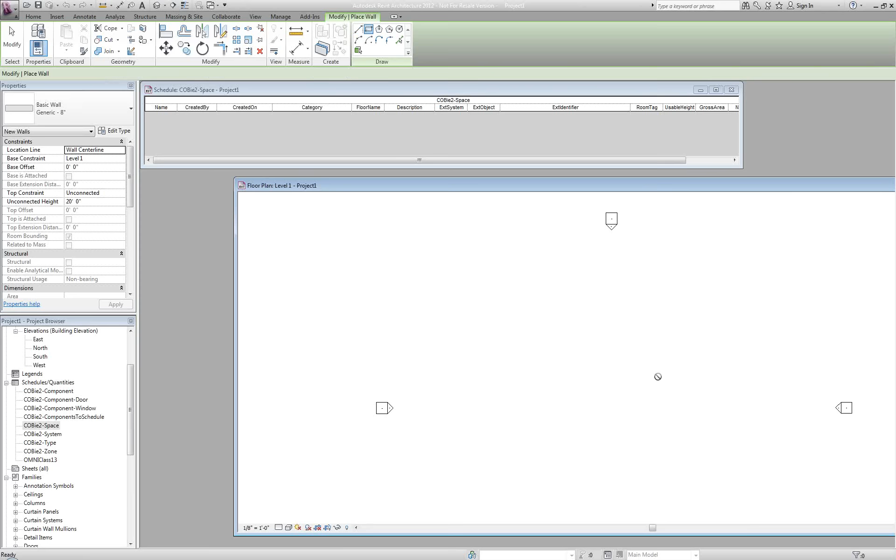So what I'm going to do right now is create a series of spaces. Let me open up that schedule and move it up here, and let's go ahead and add a couple of rooms and a little bit of equipment. I'm going to do this very quickly—we'll put in 4 walls, and drop some walls in.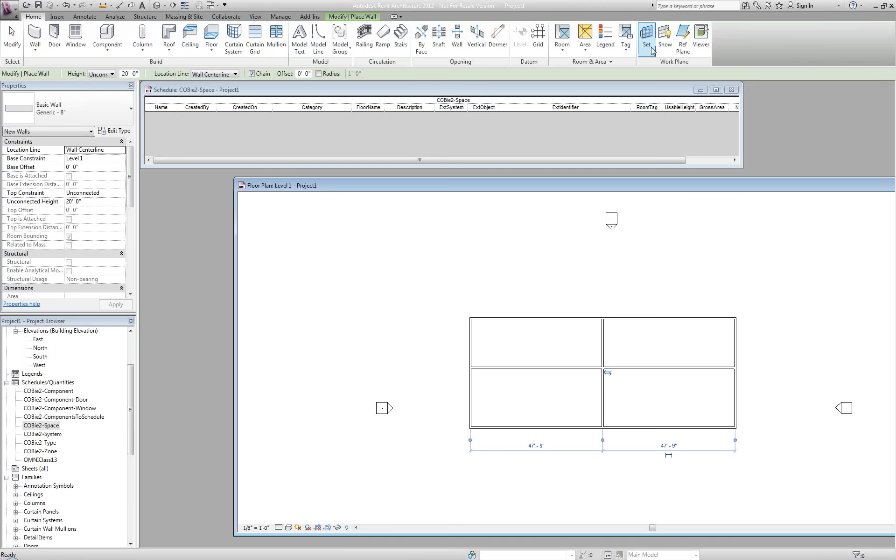At this point, I'm going to come over to the Rooms tab selection, and we'll drop some rooms in. Notice that as I'm placing the rooms, you'll see that schedule beginning to populate with the information we already know for those objects.

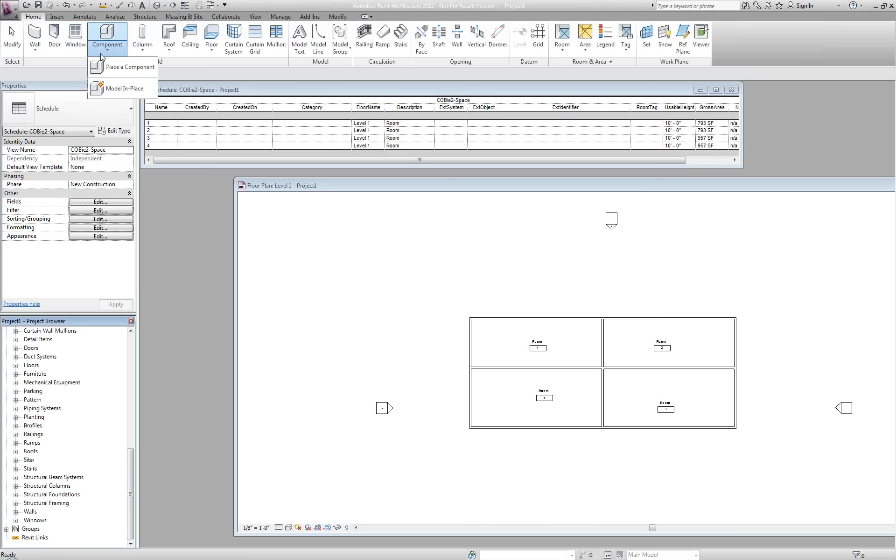In addition, we could come into our families, and I'm just going to drop a couple of objects in. Let's add a couple of components—we'll put a furnace in one room, and let's put 2 desks, again just to put in a little bit of different values. The other thing I'm going to do is drop a couple of doors in here, change the size of those doors, and place those.

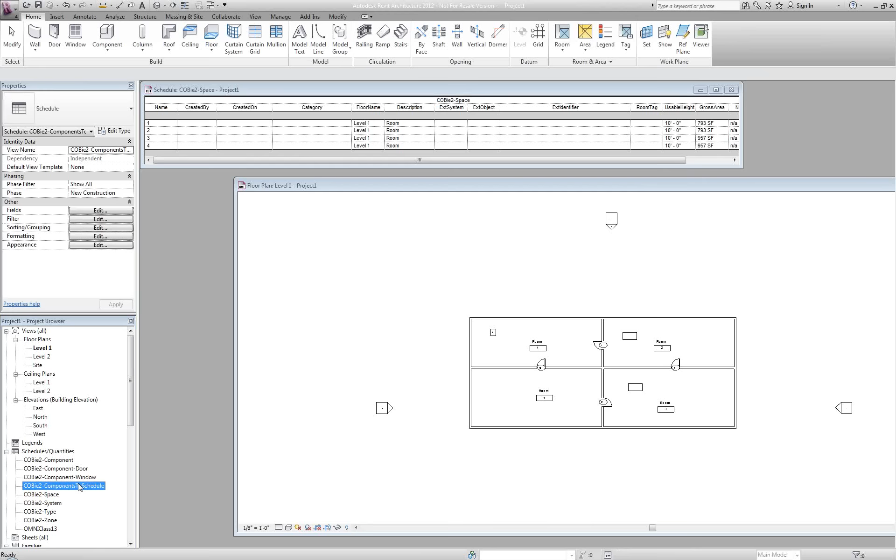At this point, I've basically created a very simple, albeit populated, model with information. The first thing we want to do—and this applies to every model, whether simple or more detailed—is determine what elements we want to schedule. For example, we might not want to populate all the equipment from the various projects.

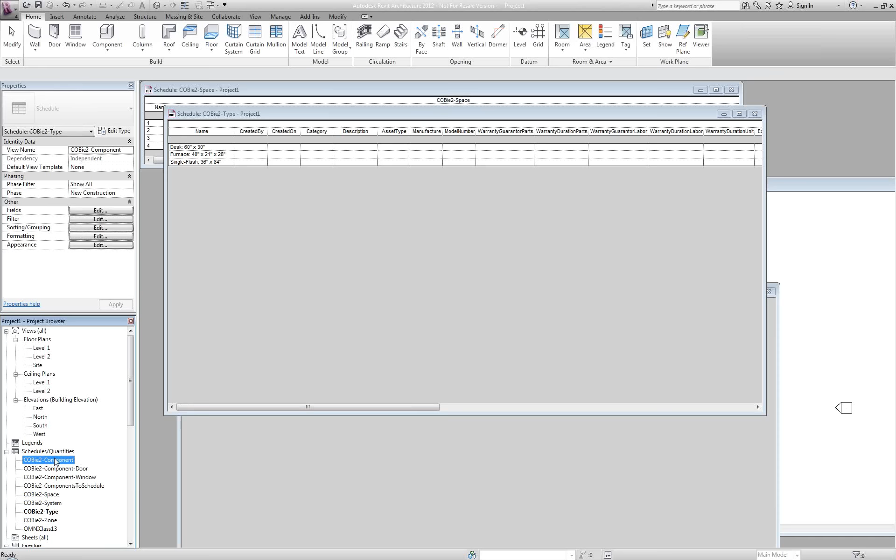So I'm going to simply say that I want to schedule the doors and mechanical equipment, and we'll take one of the doors. When I come up here and look at the type schedule, you'll see that I have the type information, and we can further look at the component information and see that that's been populated as well.

Now, as we're looking at this, we'll also see that the schedule information created by is not there. So let's move this over to the side here, and grab our COBie add-in. We're going to populate the information that hasn't been transferred over—put in the created by date, I'll just say rich at autodesk.com, and the created on date. We can fill in any of these parameters; I'm just going to go ahead and pick them all, use the GUID, and let's update those attributes.

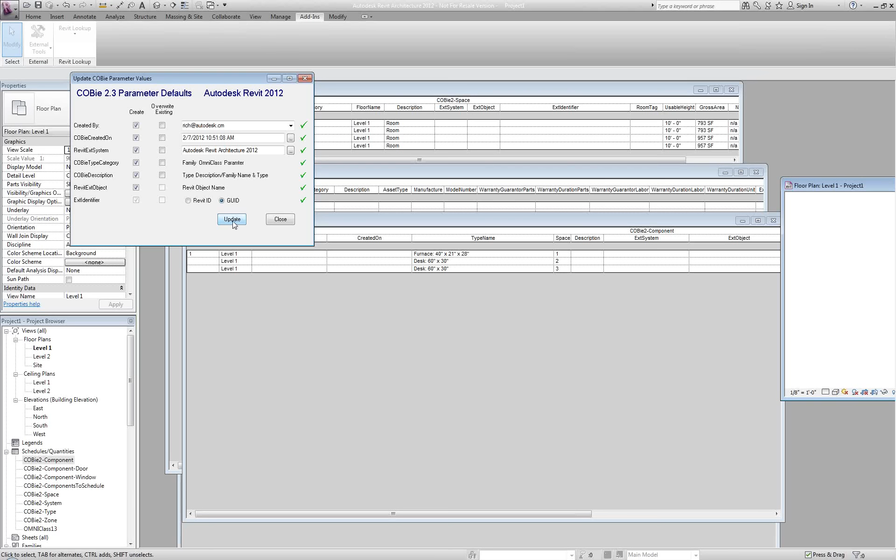And you can see that information's now been populated within that model. So those things that I have to add, for example the category, remember I mentioned that we had a schedule key for that, so I could simply come in and begin to populate those here, or I could export it and populate it within the COBie model.

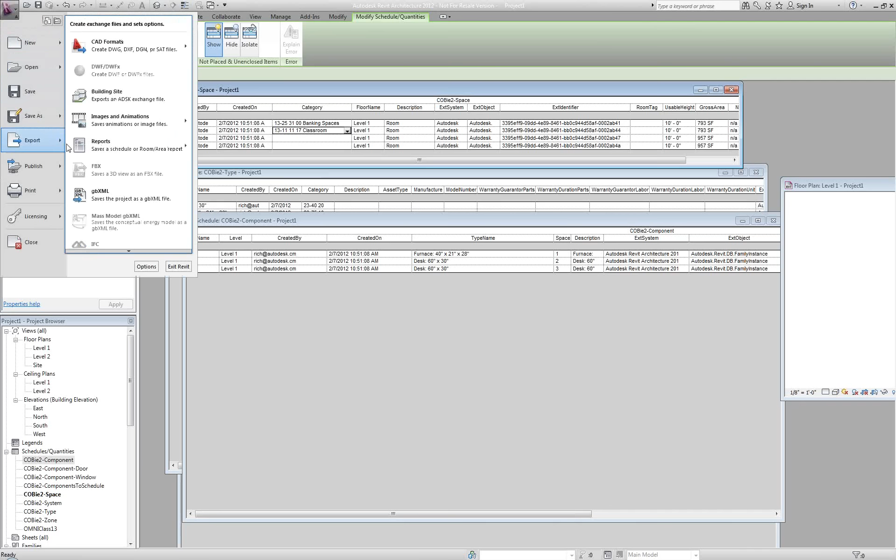At this point, all I have to do is export these schedules in the tool, put them into a space, and we're able to paste them into the COBie spreadsheet. Again, that's very clearly defined. I'm running a little short on time here. I want to show you a couple other projects and means by which some of this information has been transferred.

So again, just a quick view of how we would create a project from scratch. We won't save that. I'll go in and open up a small project here that we have, which is a medical center project that I've already started. Mentioned that we can create this with a blank template.

At that point, if we look at any of these objects, if I click on the room, you'll see there's no COBie information within the tab here. So what I'm going to do is open a project, which I'm going to open the blank project that I mentioned is in the model. So this...

I'm sorry, I don't have that one. So I'm going to go ahead. What I would do then is open that project, and place and copy those schedules in. I'm getting the 3-minute warning here from my colleagues, so I don't want to do that quickly, but that information would then be populated into that model.

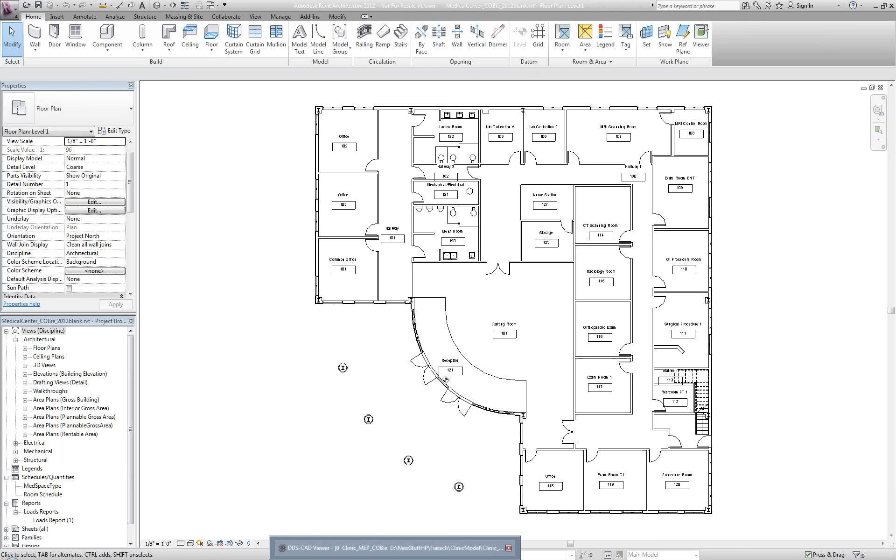The last part is that we can use that to export into any of the other applications. So, for example, if I were to go into the DDS viewer, we can open - I have a couple of models here - but we can go ahead and open that model that we just were looking at here, and I'm going to open that in the context of this model, which has already been populated. So this is in the context of an IFC.

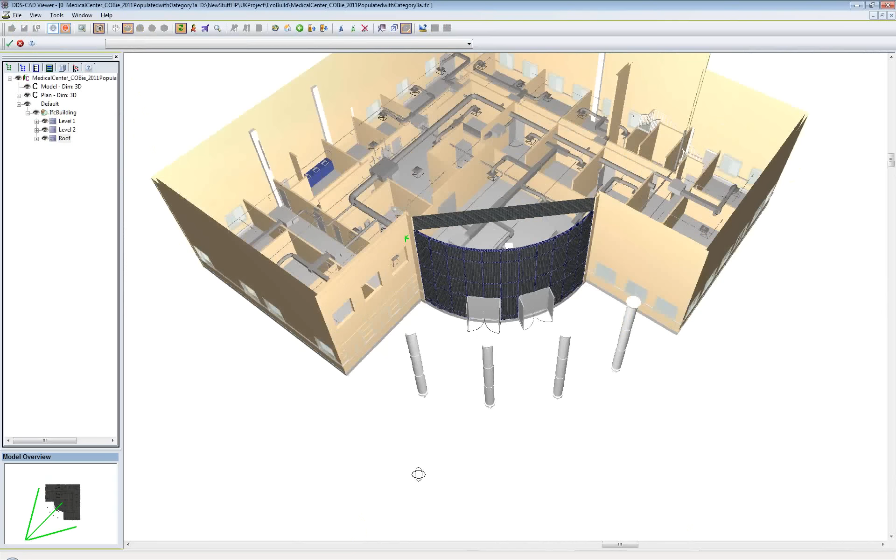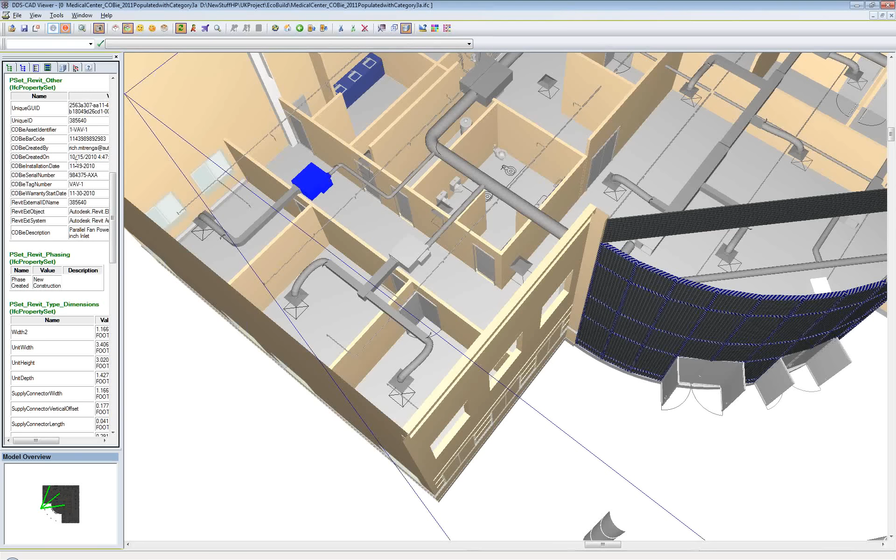So if we can export the data to the spreadsheet, we can also export the Revit model as an IFC file. I'm looking at that IFC file in the DDS viewer, and if I select the air handler, and move down here a little bit, we can see that we have all the COBie information that was generated as part of that process. So again, the ability to very quickly generate that information in whatever format we want.

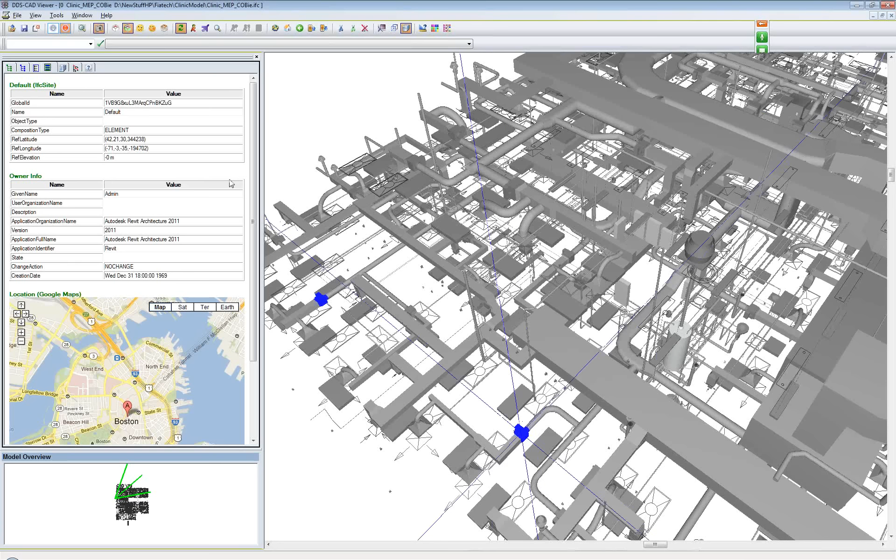The other example that we have here is also the clinic model that was put out for the COBie challenges, and the same thing applies. We simply exported that to an IFC, and in a moment here I'll just open that record. We'll look at one of those. I've got a lot of things running on my machine here, so as you're seeing this screen flash around, we've got quite a bit going on.

And if I simply say, let's edit the properties, we can open that properties dialog box. And again, the COBie information has also been populated as part of that. So directly from Revit to the IFC file, and we could populate that.